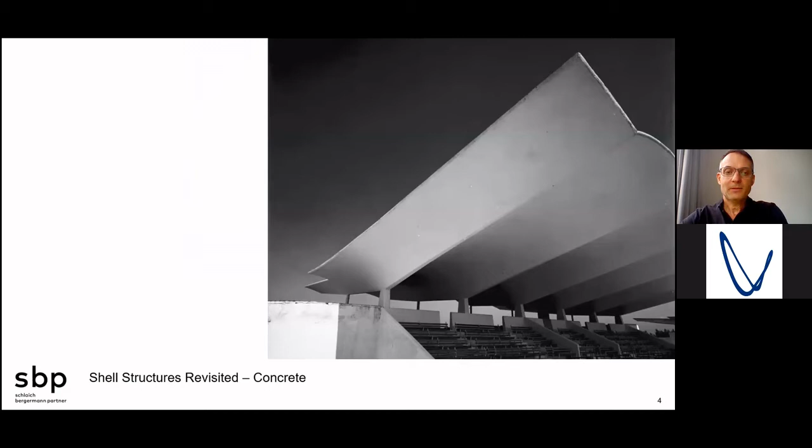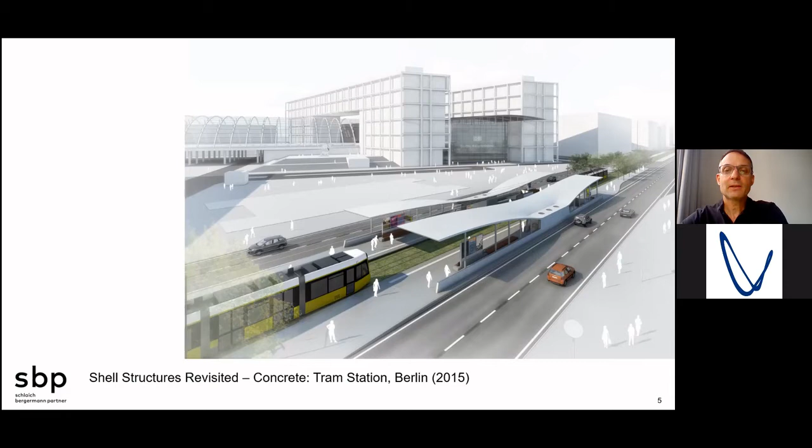In the competition phase, we had the idea of being inspired by these classical forms of concrete shells and transforming them into modern times, finding out what we can do with modern materials. We came out with these two sort of mirrored structures with these wing shapes—they have an abutment at the middle, and then wings to the outside, only supported at one side each by these columns.

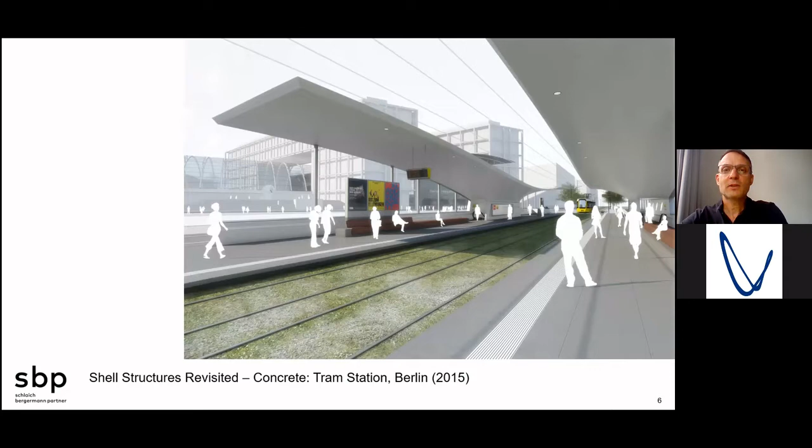And of course, the key to shell action is double curvature. To be honest, here double curvature only exists in certain regions, and in other regions it's more like a plate.

It's more flat, less curvature. So what we did is we used a special concrete which is lightweight but high strength, and we also minimized the thickness in the design so that toward the edges it becomes very thin and very light, so that even though there's bending action involved, which of course is not what you're looking for in a shell, this will work in terms of the capacity, the stability, and the deformations.

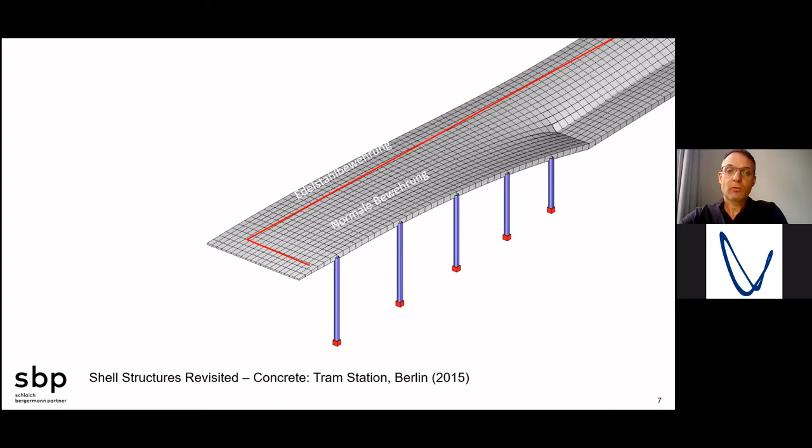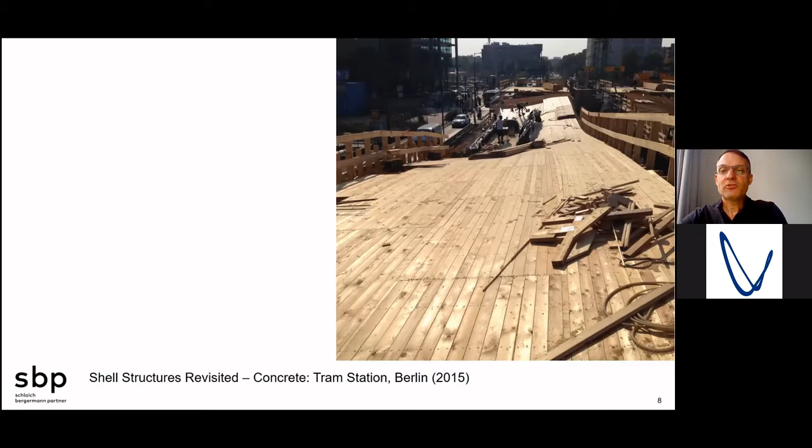And so this is also possible nowadays with modern materials. The construction of the shell was rather conventional, I would say. It was actually built by carpenters on a scaffolding, then coated, and then the reinforcement was placed. You see these timber laths here, which are kind of rulers to get the concrete cover right on the top side.

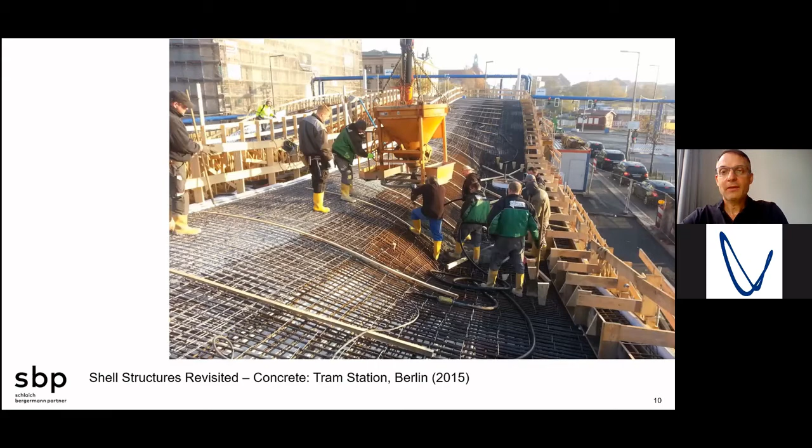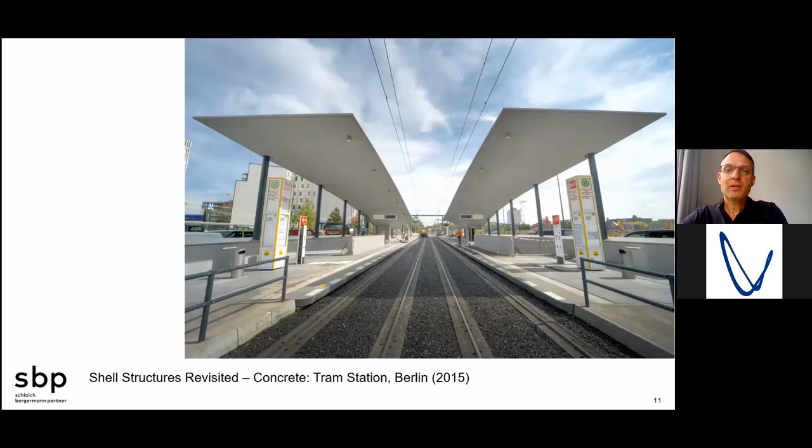Then everything was concreted like in the old days, basically. And the shell now stands there, and it has become maybe a little landmark in the region of the main train station. You can see in the background there's also a lot more construction going on. We're quite proud that with this little project we could contribute maybe a little bit to the revival of shells, even though, to be honest, it's not 100% shell, but the inspiration certainly came from the classical shell builders.

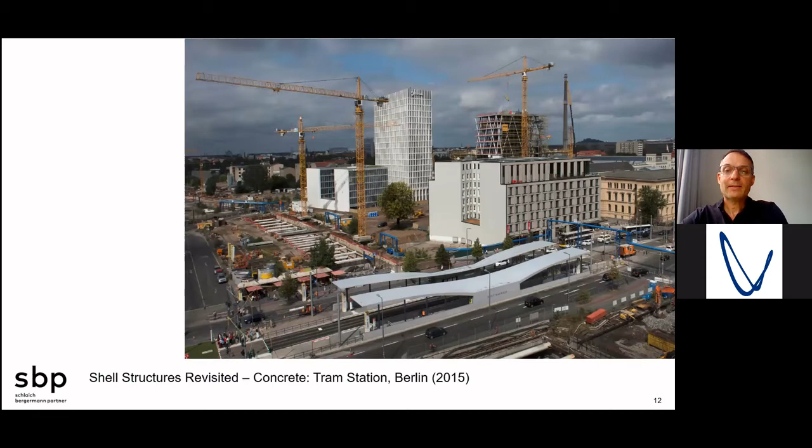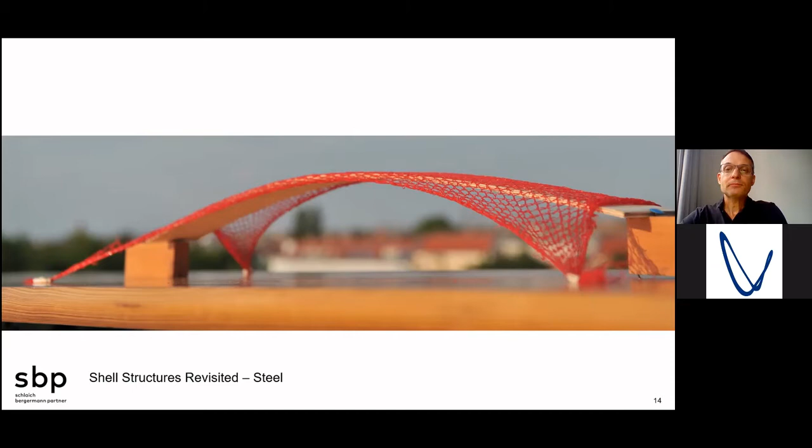But with the purpose of designing the form of a new footbridge, which would be built in steel and which will be working in compression, of course. So basically reversing the structural action of the tensile structure into a compression shell, and then transforming this kind of playful approach with the plastic net using modern computer methods such as Grasshopper and form finding software that we have developed and that we're using in the office.

We were able to come out with the equivalent structural form, a compression shell, where the shell is actually perforated, and the perforations indicate and visualize the flow of the membrane forces in the shell. So that was the underlying idea, to make visible in this shell the structural function and the structural lines.

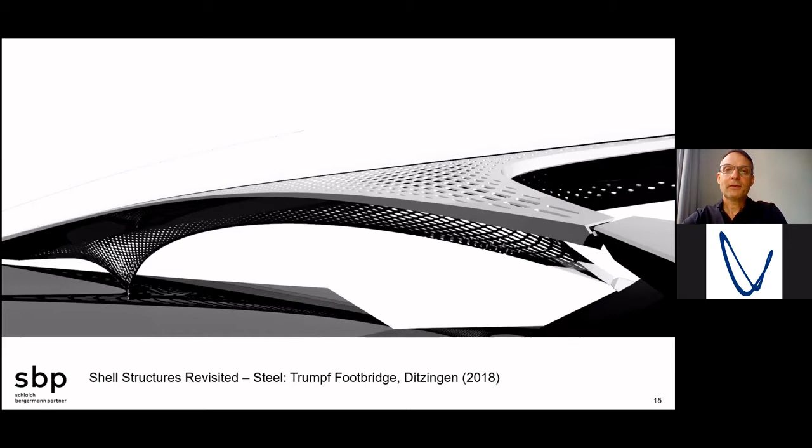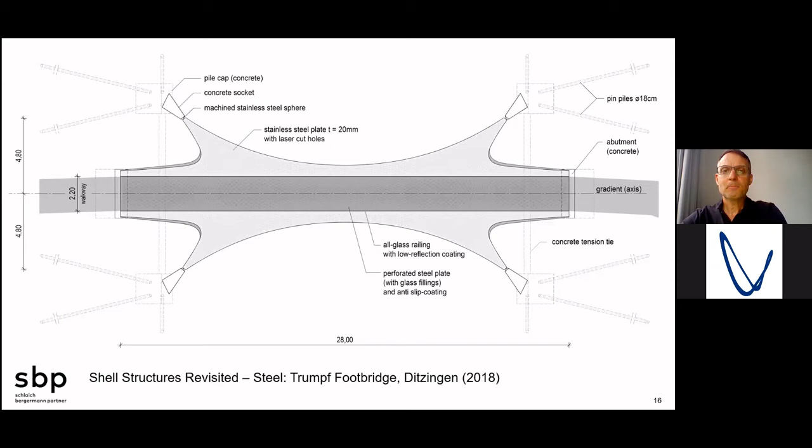If you look, this is the top view, and you can also see this is a rather small footbridge. It connects two parts of a company headquarter. The company is Trumpf. They make laser cutting machines for steel cutting. So this is another interesting link, where the client that ordered the bridge was also part of the fabrication process, which I'll show in a minute.

The interesting thing about when we started designing it, we wanted, of course, to make it as thin and as light as possible. So we came out with a 20mm thick steel plate for the shell, for the actual steel structure, which of course at the edges is a bit reinforced by stiffeners, but in the shell surface itself, it's only 20mm thick.

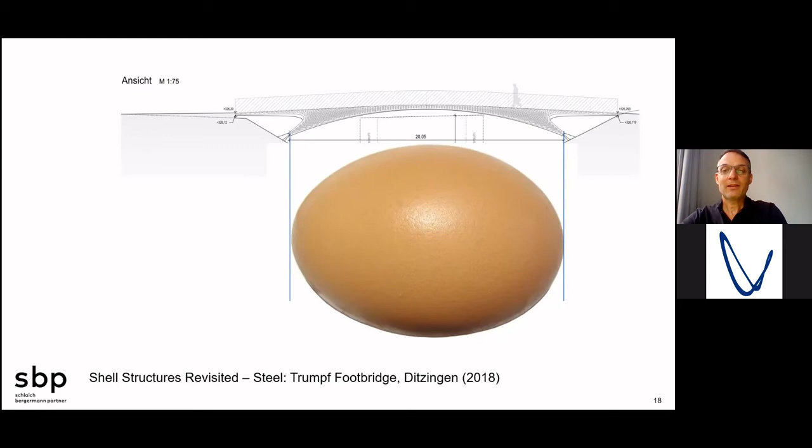And if you compare it to the shell of a chicken's egg, it's actually 10 times thinner, because if you take the length of a chicken egg and the average thickness of the shell, it's about a ratio of 125. In our shell, with the 20-meter main span and the 20mm thickness, it's actually a ratio of about 1,000. So our bridge, we're kind of proud, we made it even better than the shell of an egg. And as I said, the company Trumpf makes these big laser cutting machines.

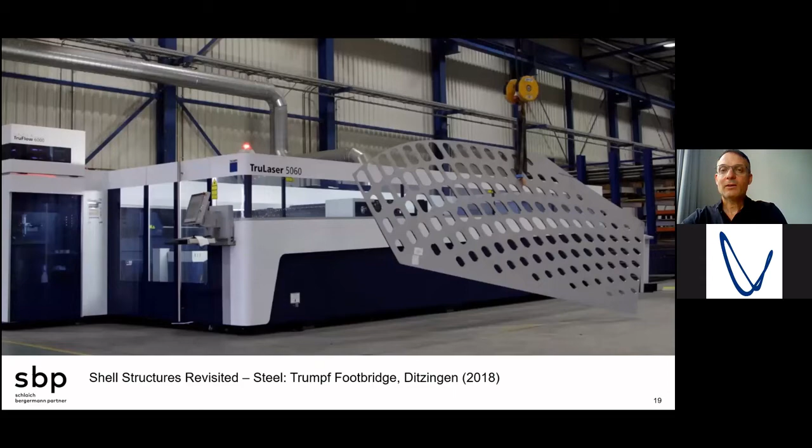They took stainless steel plates of 20mm thickness, and from our design, cut out these holes to make the perforation. Then these plates were taken to another company, a shipbuilding company that has a lot of experience in bending plates.

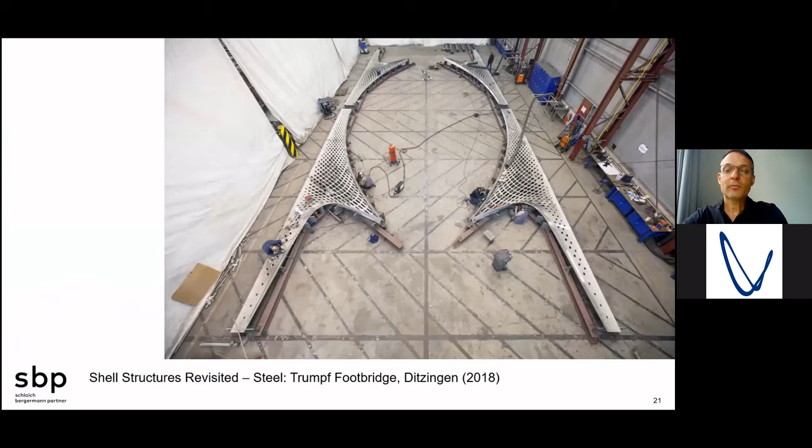With the pre-fabricated plates, they were welded together and then trial assembled, so that later on the construction site they would fit. Then they were brought to the construction site and welded together into the final structure.

Another detail is that in addition to the lateral areas of the bridge, we also perforated the walkway, which is a bit difficult because you need a smooth and closed walkway so people don't get stuck with their feet or high heels in the perforation. So we devised these little glass plugs.

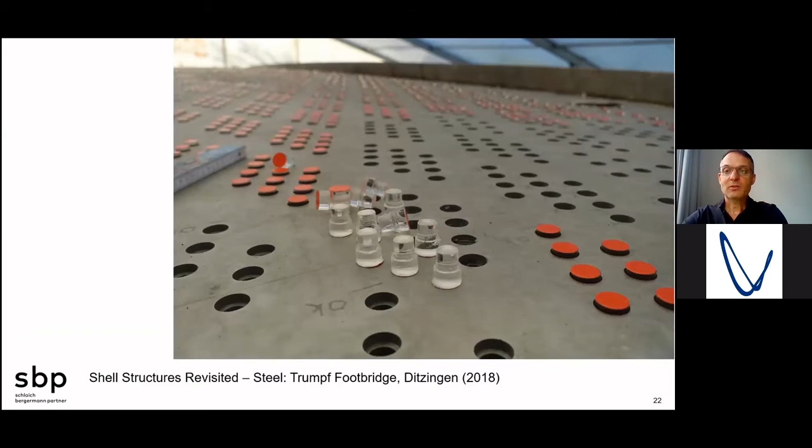I think it was 17,000 in total. Each of them sits in a little drilling through the 20mm steel plate, and then these glass plugs were surrounded with the coating of the walkway.

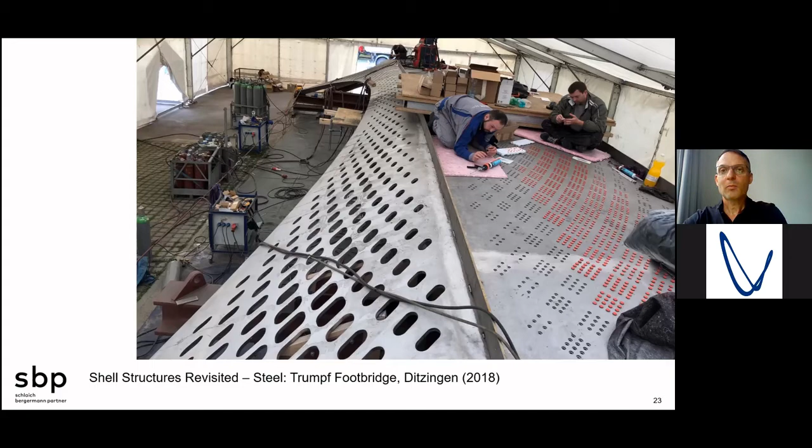You see these guys here sitting on the structure. They had to glue in these 17,000 glass plugs, and I think it took them a couple of days to do this. But in the end, the result was really nice.

These glass plugs actually have a function of carrying the light and guiding the light. So when you're standing under the bridge, it's a really nice image.

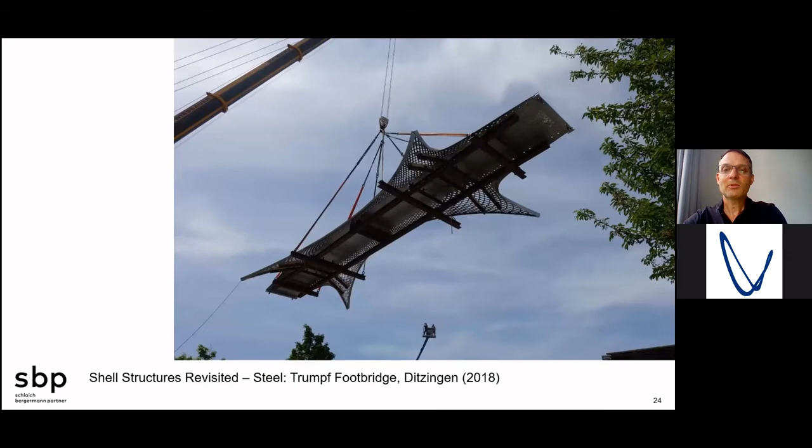This is the moment when the completed bridge was lifted into place and put down on the supports. It was also given a very transparent, low reflection parapet to emphasize the lightness.

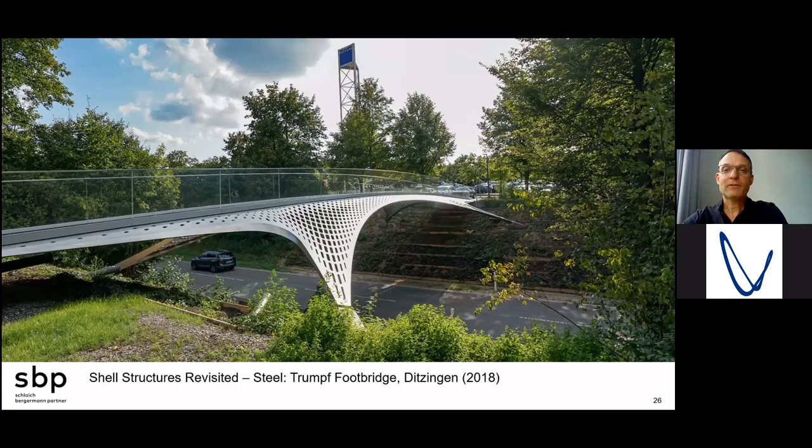Here's the underside view - you see the 17,000 drillings with the glass plugs in the walkway. So it's quite a nice picture, I would say. And at night, it's also illuminated from the underside.

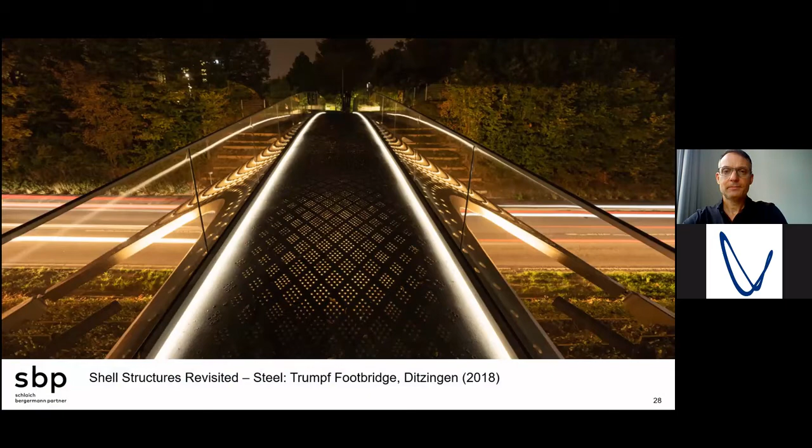Going on to another project, also related to cable net structures. Again, nobody needs to reinvent the wheel - cable net structures have been around for a very long time. There are numerous examples, for example the arena in Raleigh, a very fine example of a cable net which is pre-stressed against the concrete edge girder, and then the concrete edge girder is supported on the facade columns.

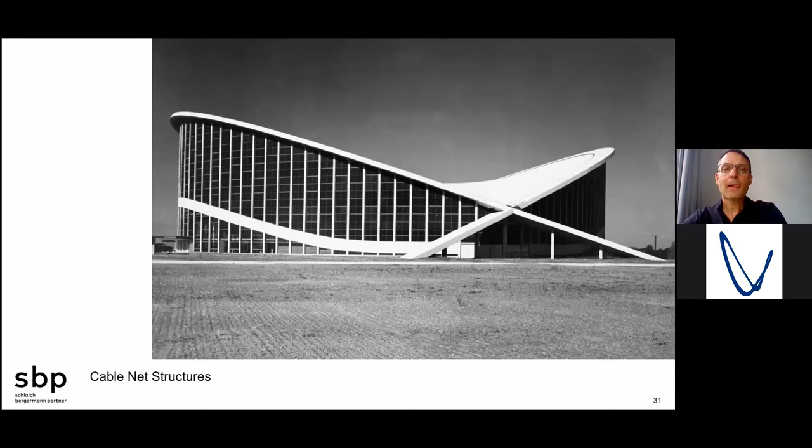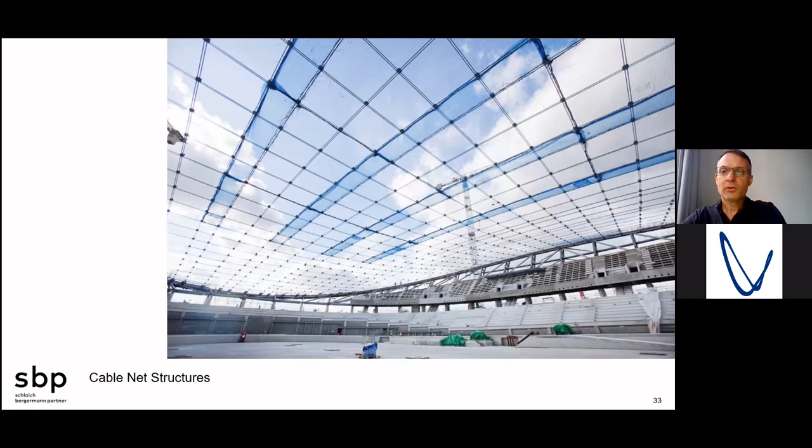There are modern forms also, like the London Velodrome, where we were involved as part of the contractor's team with the shop design and optimization, helping the contractor and Expedition Engineering to deliver this design.

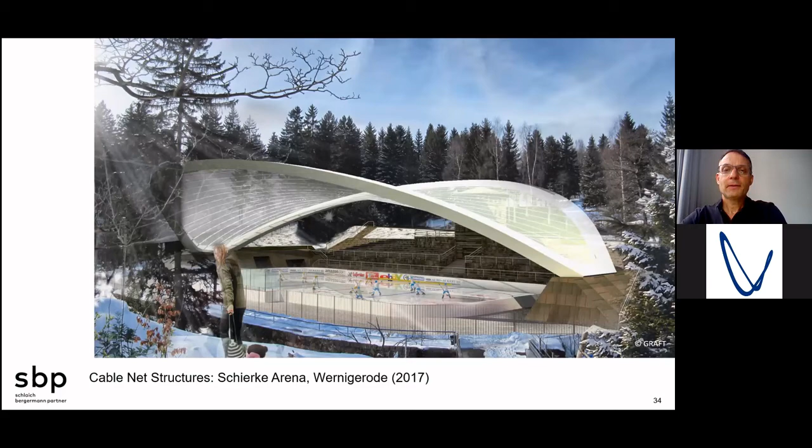From that inspiration, we got some ideas for a competition which we participated in together with GRAFT Architects - a competition for the covering of an existing historic ice rink in the town of Wernigerode in the Harz region in central Germany, a mountainous region where winter sport has always been a strong factor. This existing ice rink was to be covered with a new lightweight roof, and we knew we wanted to do something very lightweight, using cable nets and membranes.

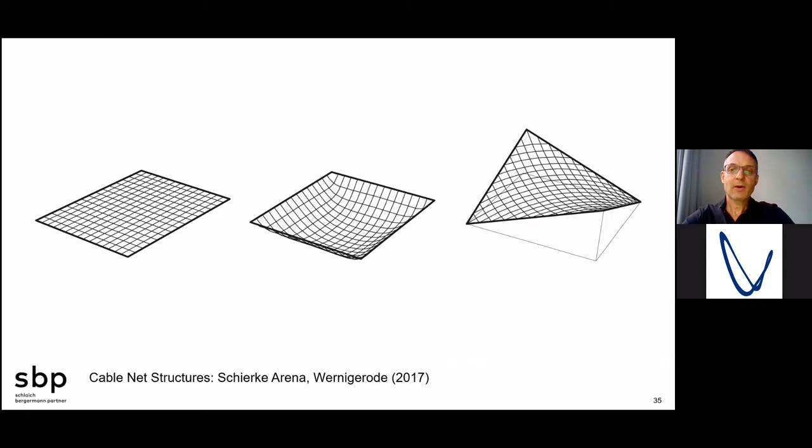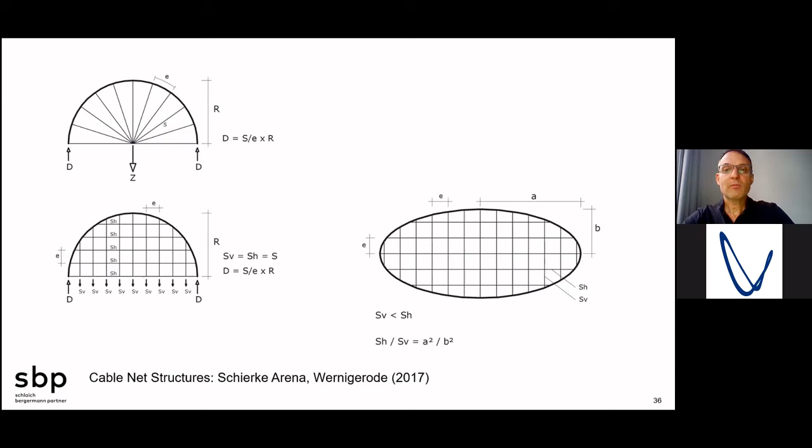We started out by going really down to the fundamentals and thinking about structural form, like a saddle shape, in order to generate geometric stiffness. We researched different forms of cable nets with different geometries of edge girders, and how the pre-stressing ratios can be found in order to get a bending moment free edge girder, then bringing it into space.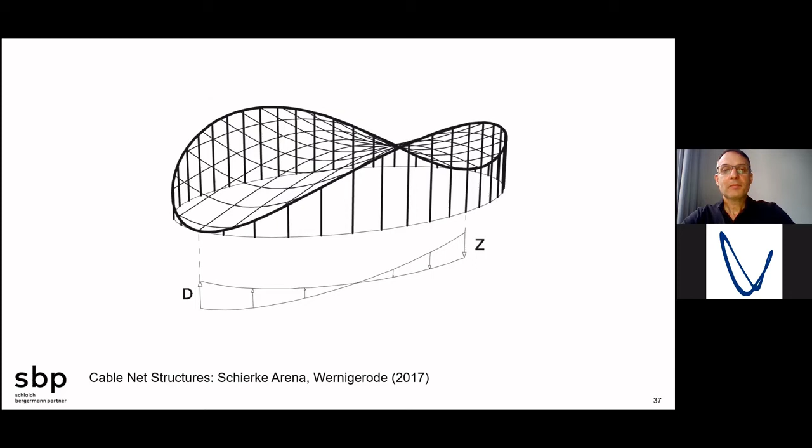This is an image that maybe is related to the Raleigh Arena roof. But of course, we wanted a roof without any corner columns.

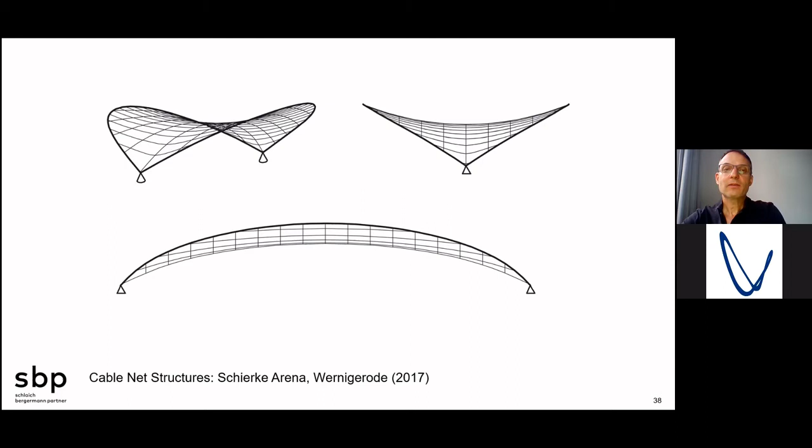So we wanted to have an edge girder, which is only supported at the ends and spans 73 meters. So it's not quite easy to get this to work. You need to be a bit creative, a bit patient, and you need to do a lot of research.

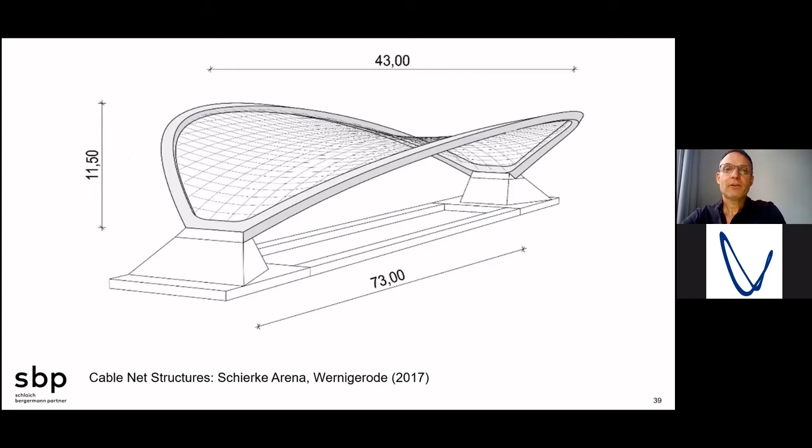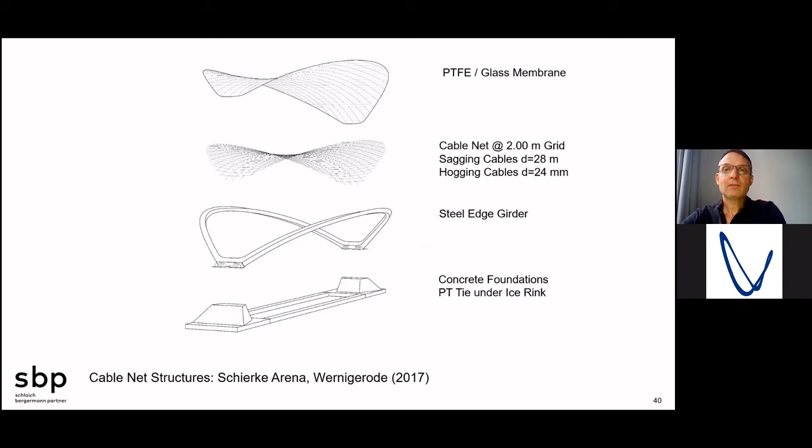In the end, we came out with this design: a steel edge girder supported on 2 abutments, which are linked in the underground with pre-stressed concrete beams, and then a free spanning structure above, which consists of curved steel boxes, a cable net with thin stainless steel cables, and finally a PTFE glass membrane to cover it all. And then the steel structure went up, and this was 2017.

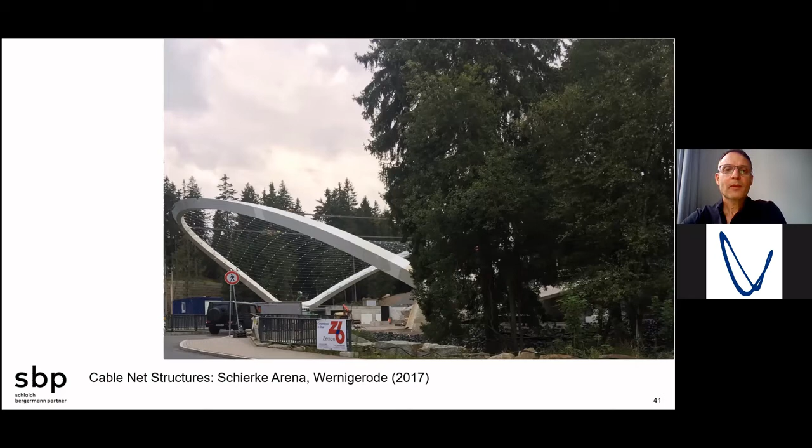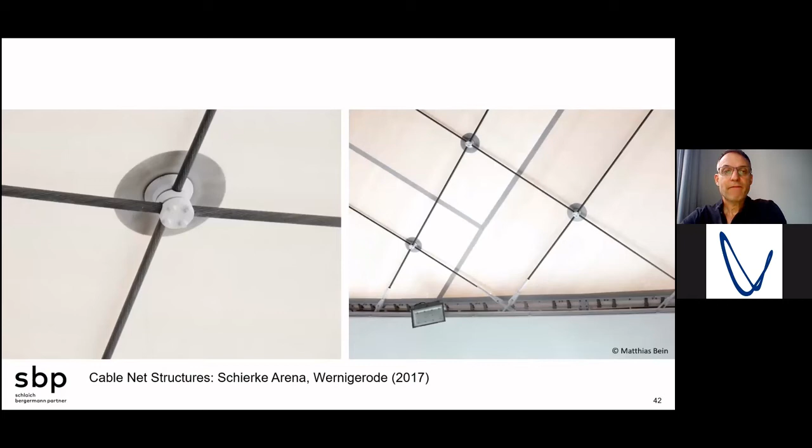It's also very important to get the details right and clean, to think about how the directions of the cables, the connections of the cables, the nodes, and even the welds of the membrane will affect and inform the appearance of the structure. Together with the architects, we think it was quite successful in really designing a clean and convincing structure.

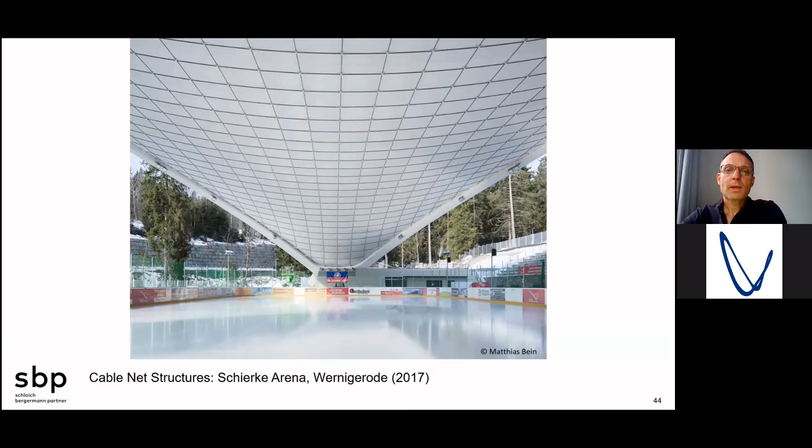And yeah, it's now transformed this ice rink into an all year round venue for sports events and all sorts of festivities.

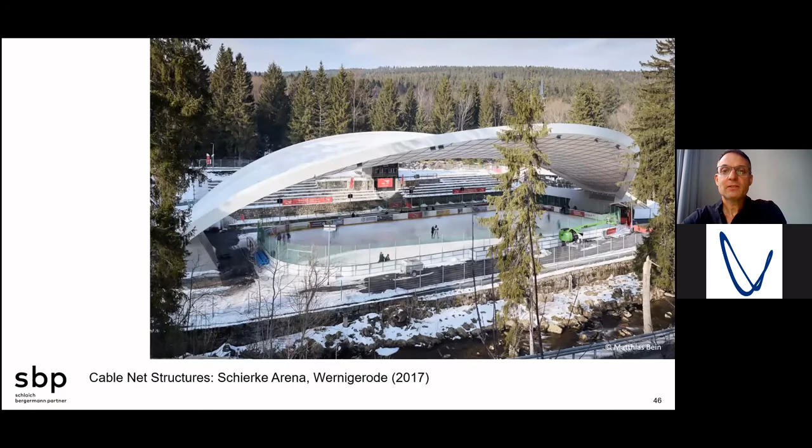The final chapter of my short presentation deals with art and engineering, because art is a discipline that deals with inspiring people and sparking joy in people. And if you manage to combine art and engineering, it can be a true benefit for both. I'm going to talk about a project that we did with the artist Christo from New York City.

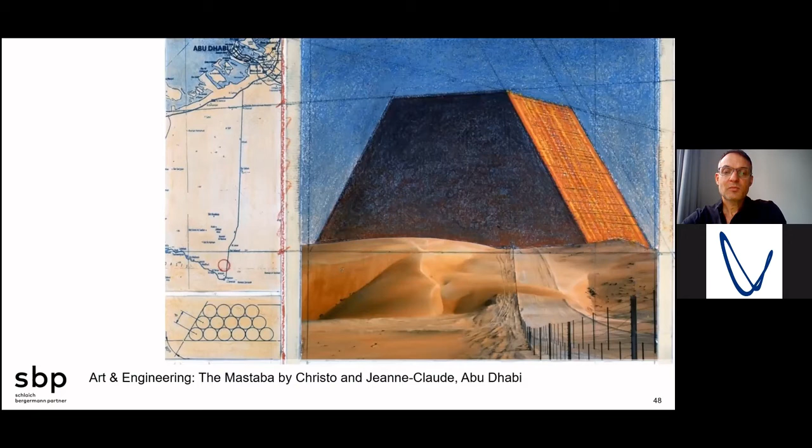One of his biggest projects is called the Mastaba. Of course, unfortunately, a few months ago, Christo passed away, but his work, some of it, continues. I'm going to talk about a project that we've done with him in recent years.

This big sculpture would have been, or would be, if it gets constructed, the largest sculpture in the world. It's actually taller than the pyramids of Giza. It's 150 meters tall.

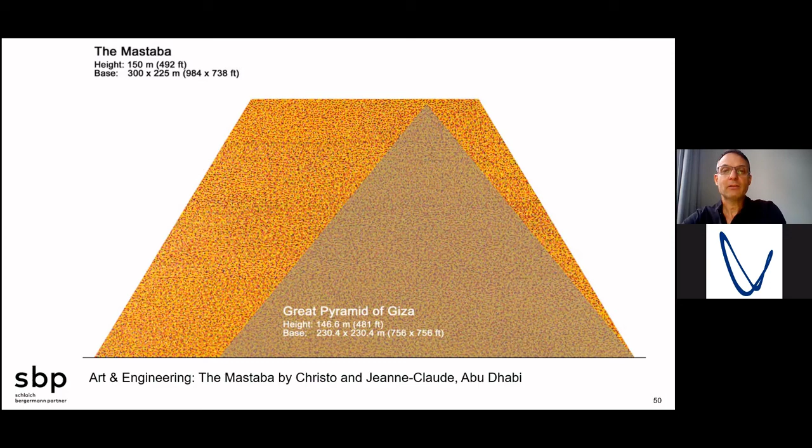Geometrical form: the mastaba is kind of a truncated pyramid. It's a typical architectonic form from the Arabic world, and in this case, it would be a sculpture covered with 400,000 oil barrels, colored steel barrels, which was the artist's idea.

He came to us to ask to help him realize it. So we did a feasibility study for him to find out what structural methods, structural forms, materials, erection processes, and so on could effectively and economically design such a large sculpture.

Here you see again the dimensions: 300 meters by 230 meters in the base, and 150 meters tall. So really a mega structure.

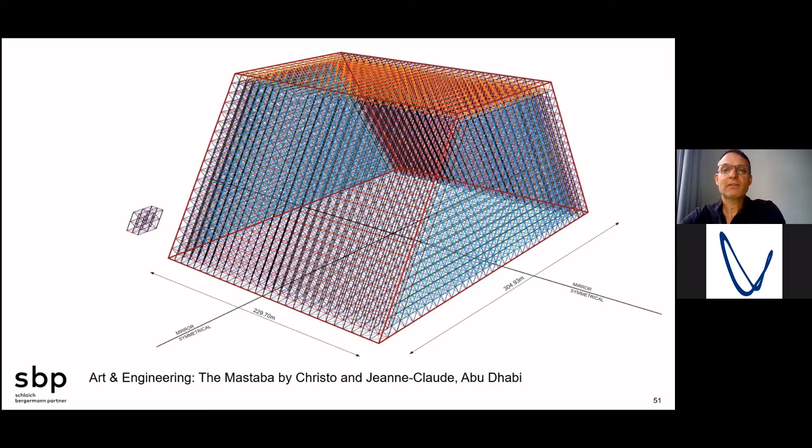Here's an image of a space frame, one of the solutions we found, studied, and designed to a certain degree to make sure the quantities and feasibility were guaranteed. There are several layers and hierarchies in this structure.

There's a main structure, which is a space frame, and on top of that sits a secondary structure, the support for the oil barrels. Then the oil barrels themselves sit in clusters as a tertiary structure, which can be moved and rotated for inspection, maintenance, and eventual replacement. It was a very detailed study and design.

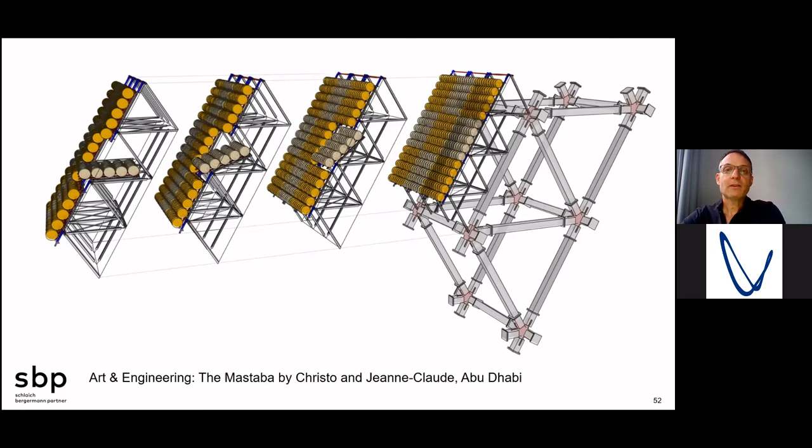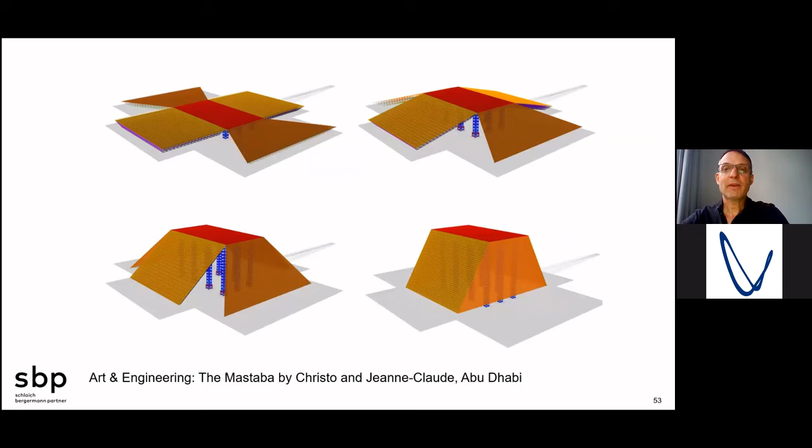One part of it was also the erection process. One of Christo's ideas was that the whole sculpture should not be built bottom up like a building, but should rather grow out of the ground. So we devised a lifting method where everything would be assembled flat on the ground and then finally lifted up into space with large hydraulic jacking towers.

And of course now it's questionable whether it will get built, but who knows, it might still happen.

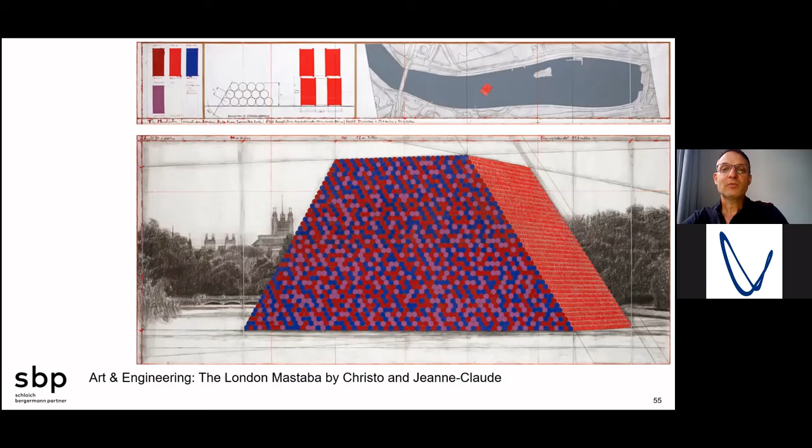In the meantime, before Christo's death, there was a small demonstrator project that happened in London in 2018. Maybe some listeners will have seen it on the Serpentine Lake in Hyde Park. This is called the London Mastaba, and we were also involved in this project. It's of course a bit smaller.

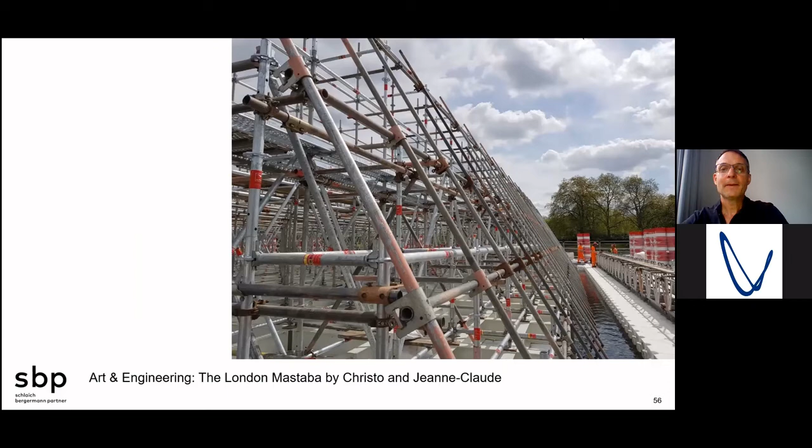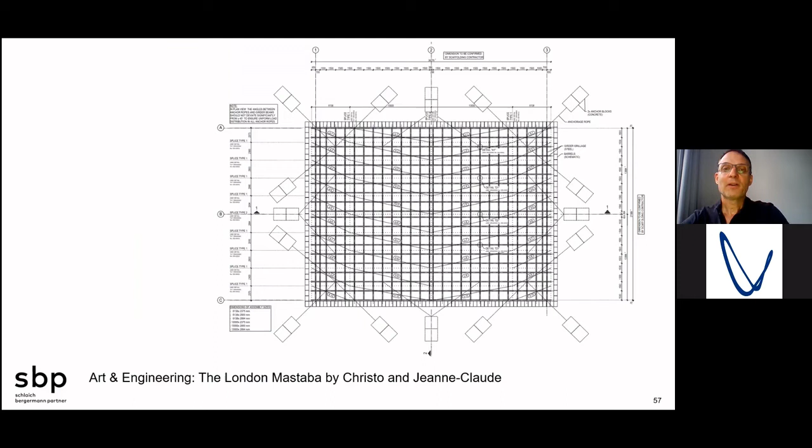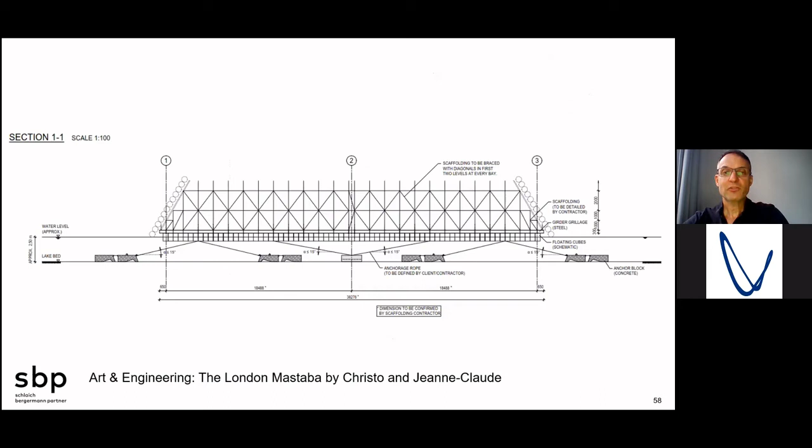It's only 15 meters tall, but there's also a spatial structure underneath, made out of scaffolding elements. The special trick here is that it's sitting on a floating platform in the Serpentine Lake, not on a concrete slab, but on floating cubes. You can see here some technical drawings we did. There's a layer of plastic cubes that form a large pontoon, anchored on the pond with concrete anchors. On top of that sits a spatial frame of normal scaffolding elements.

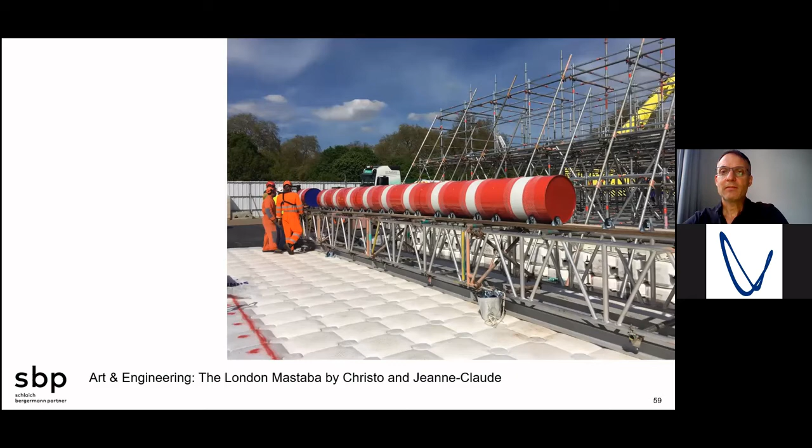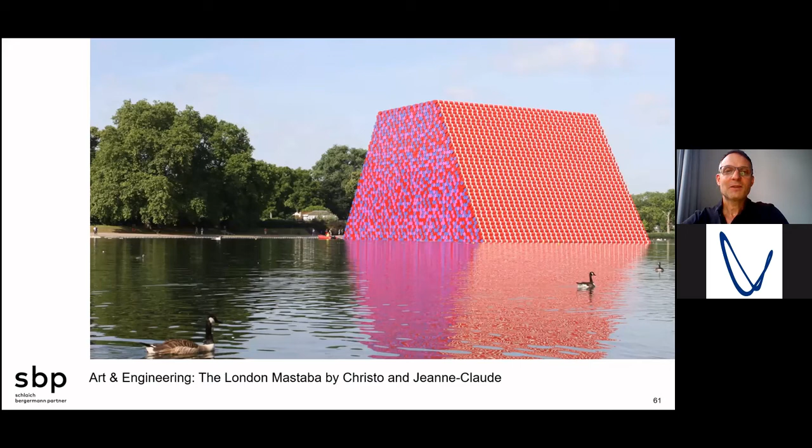Here you see some photos from the installation process. You see the painted barrels coming and getting assembled in lines, then lifted onto the space frame and fixed there. There's a nice color scheme. Finally it was there and it was swimming, and it was a funny sight to have this very colorful object sitting in the park. Then Christo came from New York to give the approval, and when the master comes and smiles, then you have done most things right.

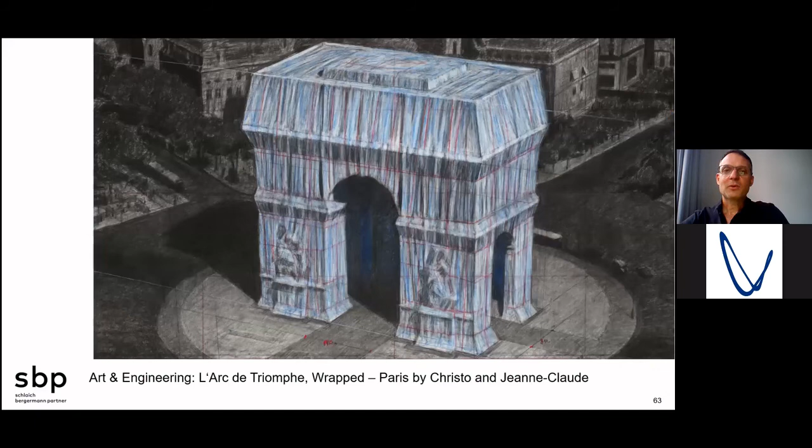Talking about Christo, there's a whole series of projects we've fortunately been able to do together, and a current one, despite his death, being realized at the moment, is the wrapped Arc de Triomphe in Paris. Some of my colleagues are actually now on site supervising the erection. We have spent the last 2 years developing a concept and design together with different contractors.

There's quite a lot of engineering involved in the substructure, and as I speak it's being assembled in Paris. In a few weeks, starting September 18th, I think, this will be finished and will be up for 2 weeks. So the lucky ones of us who are able to travel to Paris will be able to enjoy this.

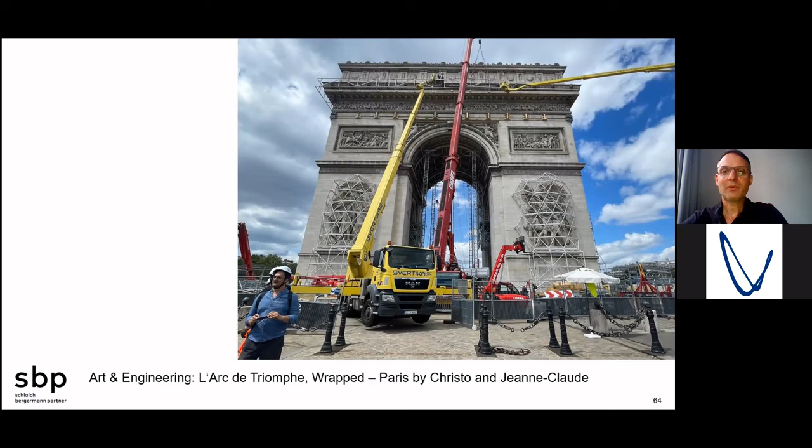Okay, this is the end of my little show. I hope it was interesting enough. And yeah, back to Mark.

Boris, thanks so much for taking us through your presentation there. That was a wonderful tour of a very great number of subjects. We covered applications of shell structures, and it was great to see the inspiration of Felix Candela, obviously a member of the spatial structures community we've covered in several of our interviews. It was wonderful to see some excellent examples of cable net structures, and also the topic of art and engineering, and your work in collaboration with the late artist Christo. So thanks very much for sharing that with us. And I must say the example you shared of form finding using plastic nets was wonderful, and I can well imagine some academic colleagues who may wish to use that or be inspired in their teaching. So thank you very much for that.

Thank you, Mark. Well, let's move on to the final section of our interview, Boris, which looks towards the future of spatial structures. And indeed, you touched on this in your presentation with respect to the 2021 conference and its theme of inspiring the next generation. What advice would you offer, Boris, to aspiring engineers or architects looking to enter the field of spatial structures?

I would say dealing with spatial structures as an engineer has great potential to develop your creativity, to play out your curiosity in finding new applications of existing ideas and existing experience. Because none of this is really invented by anyone today. The principles have been around for a long time, they're well understood. I think the beauty of it and the task is really to take these ideas and solutions that are around and bring them into a different context, and apply them there. I think this is where engineers can not just satisfy their own curiosity, but also show others what is possible.